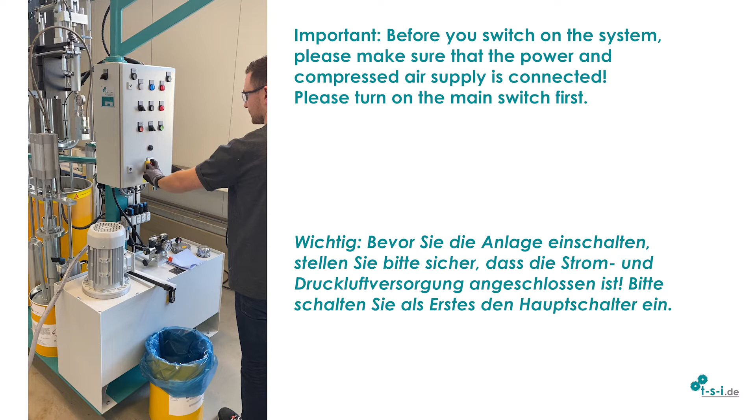Then open the ball valve for the compressed air supply. Please switch on the control and the hydraulic motor.

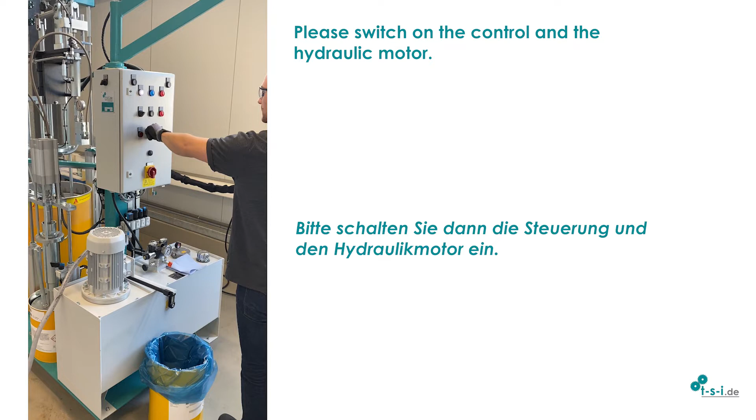Please remove the night cap from the 2C material valve. Then press the pistol and the shortage unlock button at the same time.

Please check whether both components come out of the material joint. If this is not the case, please check the material joint for blockages and the function of the 2C material valve.

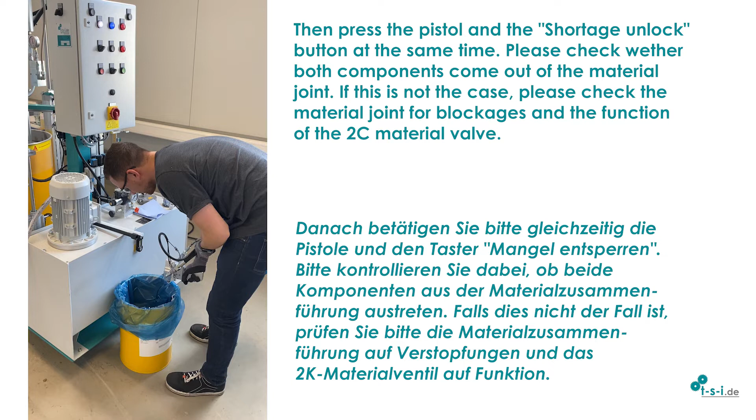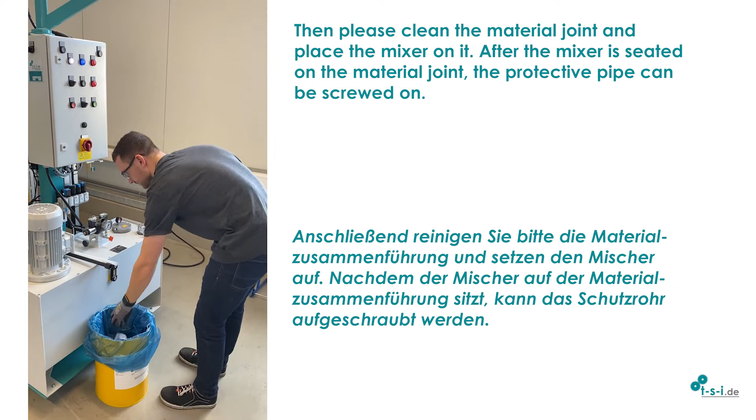Then please clean the material joint and place the mixer on it. After the mixer is seated on the material joint, the protective pipe can be screwed on.

Please press the pistol and the shortage unlock button at the same time to fill the mixer. The system is then ready for use.

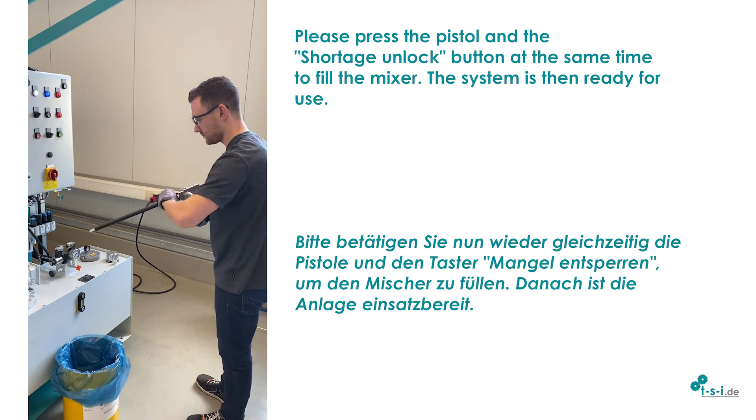Switch off instruction.

Please switch off the hydraulic motor first. Please remove the mixer afterwards. Please then press the pistol to release the system's working pressure.

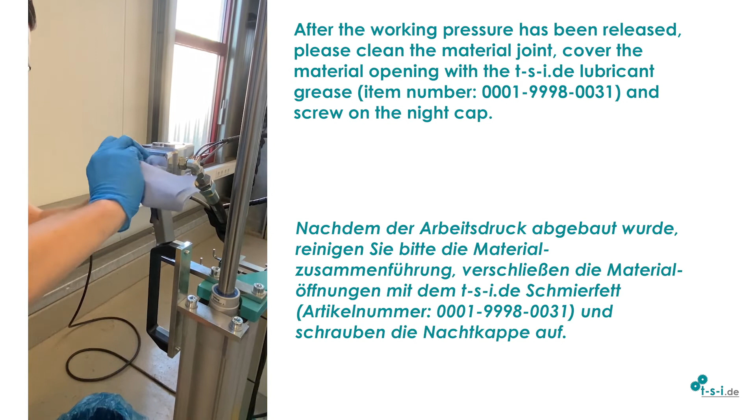After the working pressure has been released, please clean the material joint. Cover the material opening with the TSI.de lubricant grease.

Item number 0001-9998-0031. And screw on the night cap.